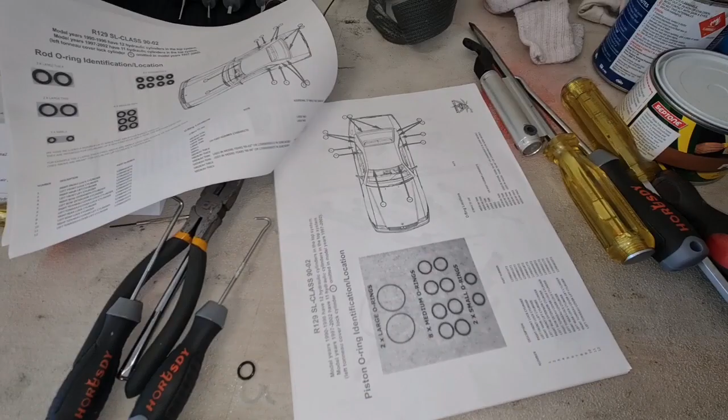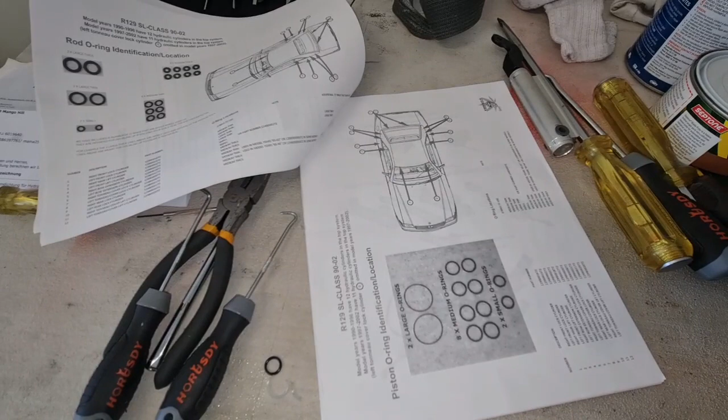Please watch this video. I have been struggling with this problem for the past 2 months and I have doubted everything. Every micro switch, every cylinder, even the pump, even I checked every single line to be in the correct port. I couldn't find this problem until today I solved this issue. Please keep watching this as there is no other video telling you about this problem.

First of all, apologize about my voice because of flu.

So after replacing all of the rear cylinder seals, including the tonneau cover, the bow cylinder and the rear locks, I had this problem that my roof operation was super slow and sometimes the lock wouldn't unlock without tapping on them. And also the process would stop with the pump stopping in the middle of lifting the bow, and the bow itself couldn't lift itself.

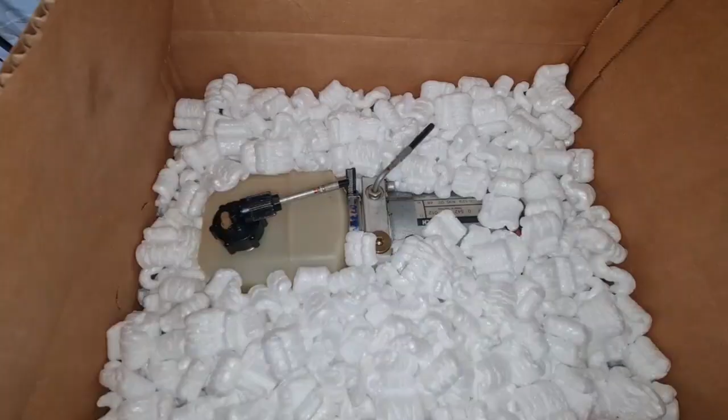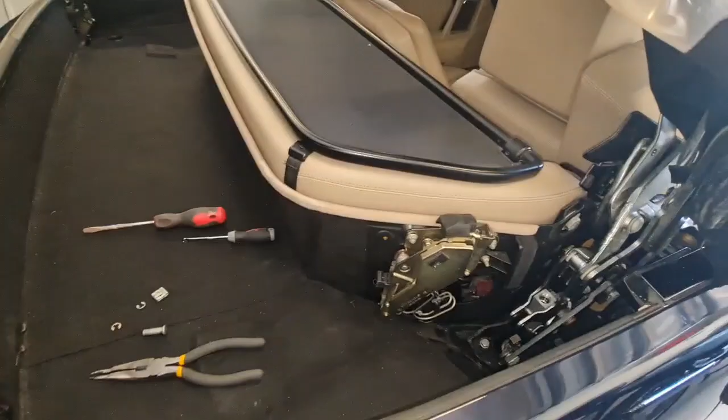So I have been thinking about all this issue the past month. I even ordered a used pump to check my pump pressure, and I tried to check everything that is wrong with my pump, and I couldn't figure it out. I replaced the pump and the pump was not faulty actually. But now I think I have found what was the problem.

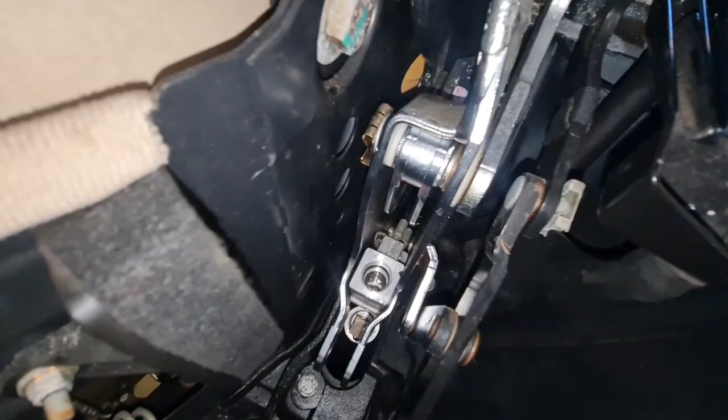So I went and looked at all of my videos and found out that I might have a problem with the bow extension because bow lift was impossible. So there was no power whatsoever to lift the bow, and this was interrupting the whole process and sequences of the top. So I came here, I took off the top pin, and as you can see, this is the bow cylinder, and using my handmade tools I pulled the top off, and here is what I have found.

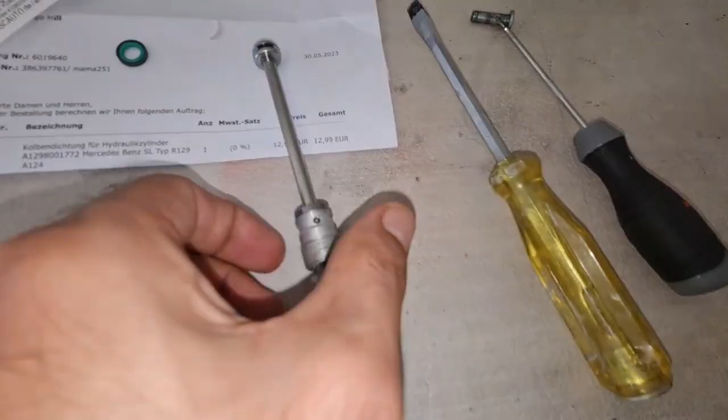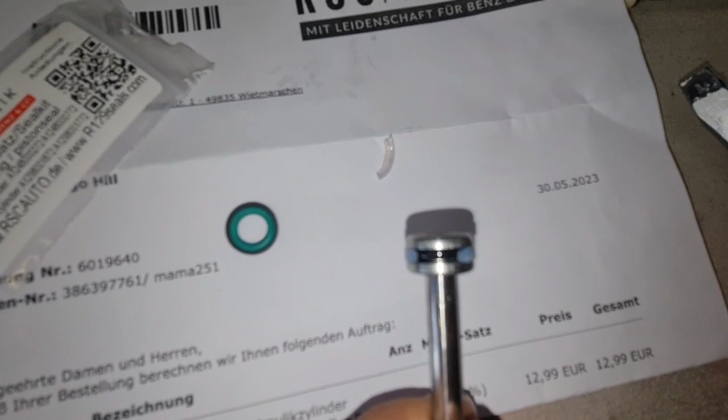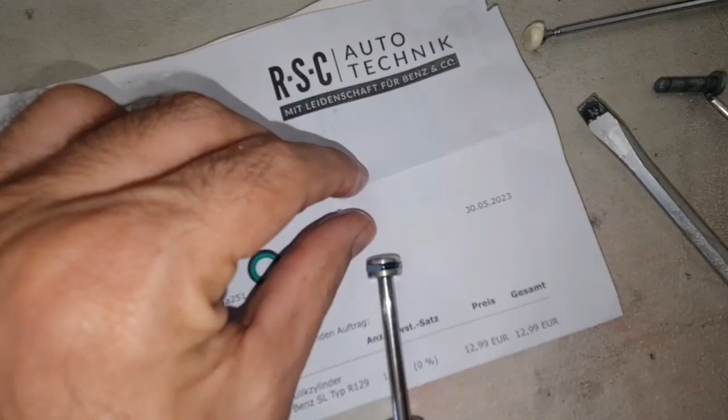So I unscrewed the top cap and I found this situation over here. The piston seal was broken and bad. And here is a piece of piston seal that I took from inside the cylinder using chewing gum.

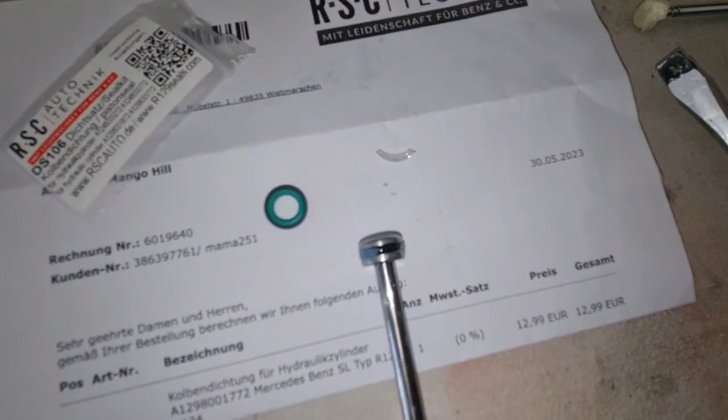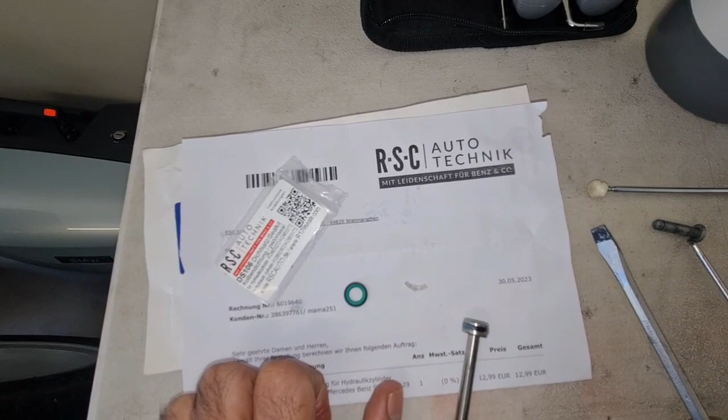So I anticipated this situation and I knew that I probably have an internal leak. So I ordered one of these piston seals from this company. This might help you. Well, I thought I'm going to get 2 of these, but unfortunately I received only 1. So I'm going to replace 1 only at this moment.

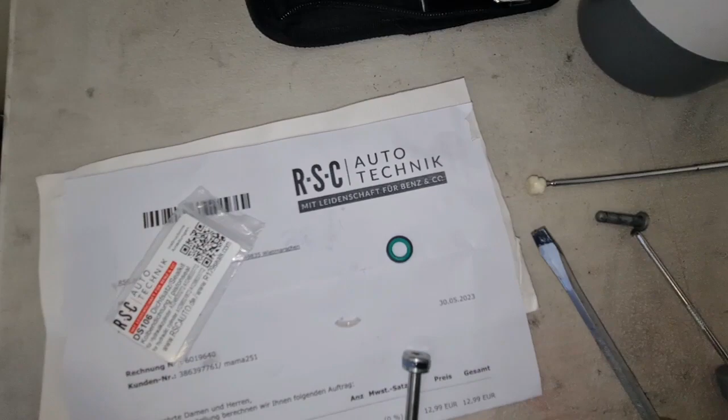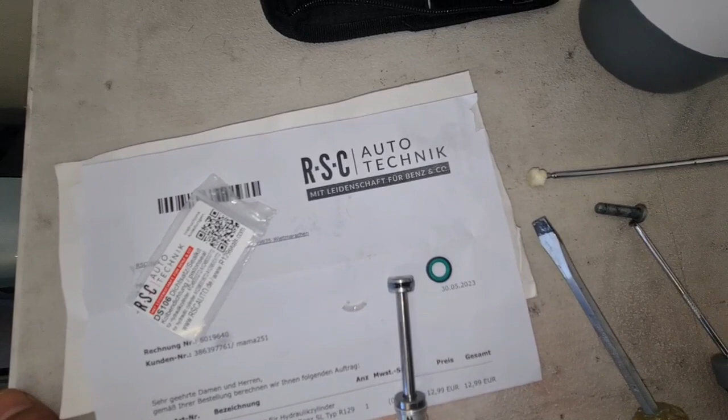I am not sponsored by these guys, but you probably will find these guys are the only people selling these piston seals. So what am I going to do? This is a very special piston seal, first of all. Second, it took me about 2 weeks to get this part, 1 seal only, and it cost me 34 Australian dollars, which is a crazy amount to pay.

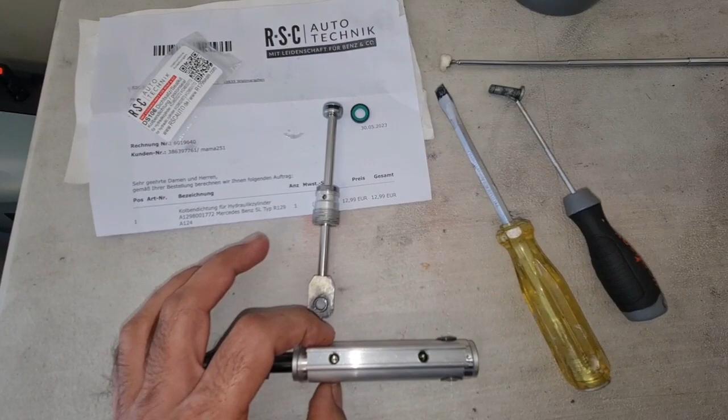So as I mentioned in my previous video, if you have such a situation, what happens is fluid comes from one port of the cylinder trying to push the piston back or forth, but because of the internal leak of the piston seal, you will get all the fluid out from the other port without being able to energize and move the piston, and the whole system will slow down because of that kind of leak, which is called internal leak or internal bypass.

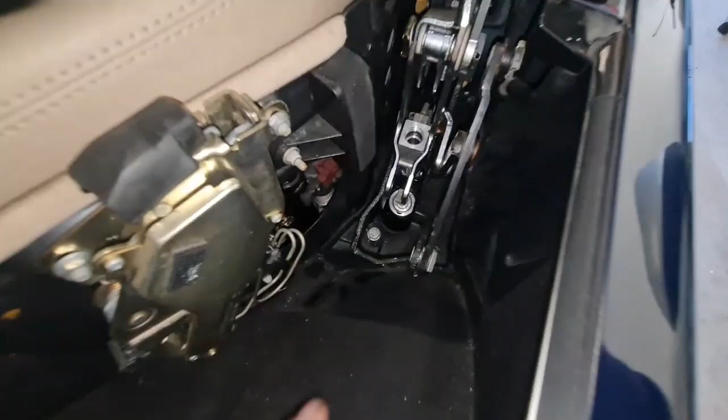So the only way to solve this problem is replacing the seals for the piston and checking that everything is good. So that's why we are going to do this today. And if you ask me how I removed everything from here without taking apart the lines and the lower pin, well, that was easy. I have a lot of access from here when the bow is up, so you can easily take off the cap using a special tool, and that's what I did.

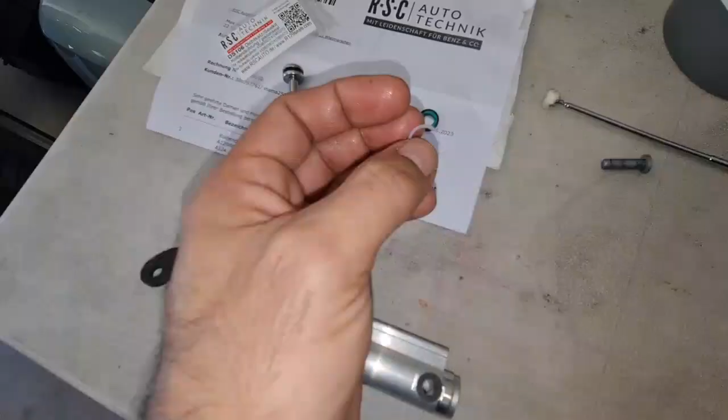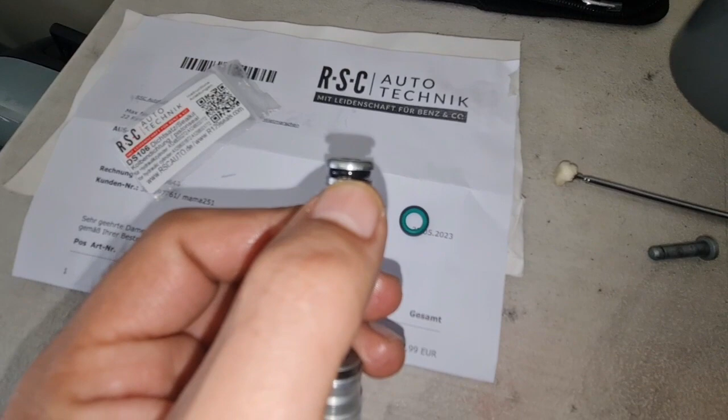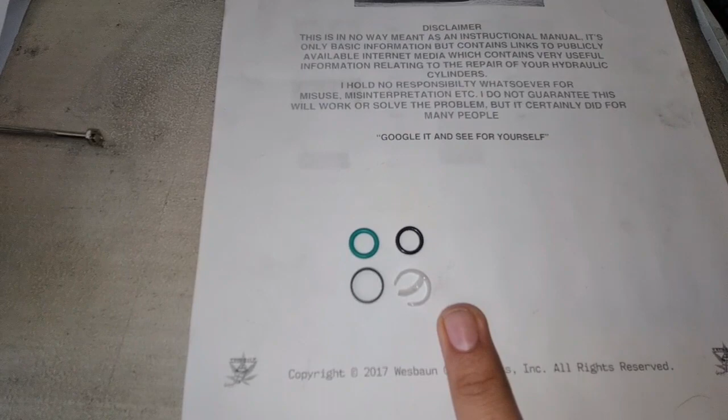So how on earth am I going to put this new seal back? Taking off this broken seal is easy. There is one internal seal in there as well that I'm going to take off. That's no problem. But how am I going to put this one back? Well, let's find out. So removing was easy because I could force these two out with no problem, and as you can see, it's out.

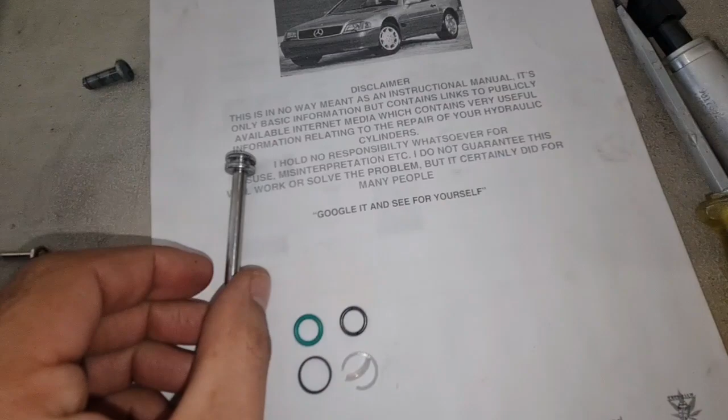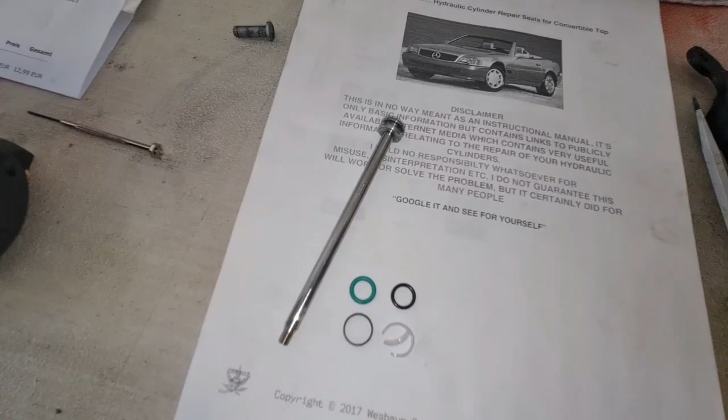So with a little experiment, I can see that my magnet does not absorb the shaft very well, but it absorbs the piston very well. So these are two different materials, and I can say this from over here.

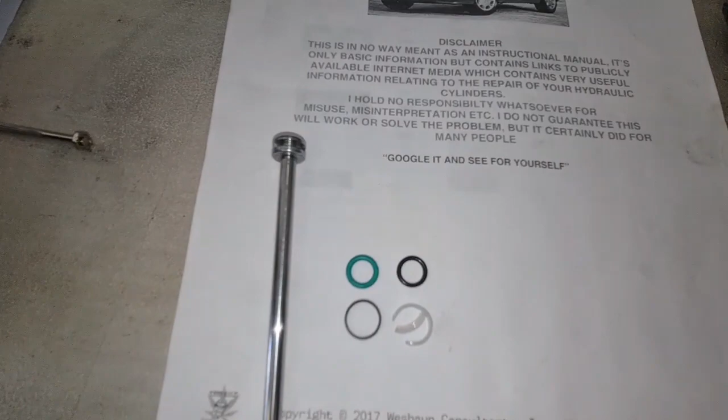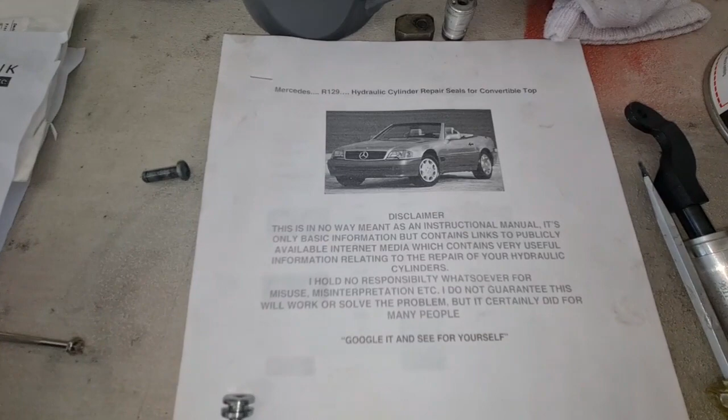So it looks like it's screwed on, but to be honest, I'm not 100% sure because there is no material at all. And even this booklet over here says that replacing the piston seals is a professional job and you need to send it to get rebuilt. So I am left with my own experiments.

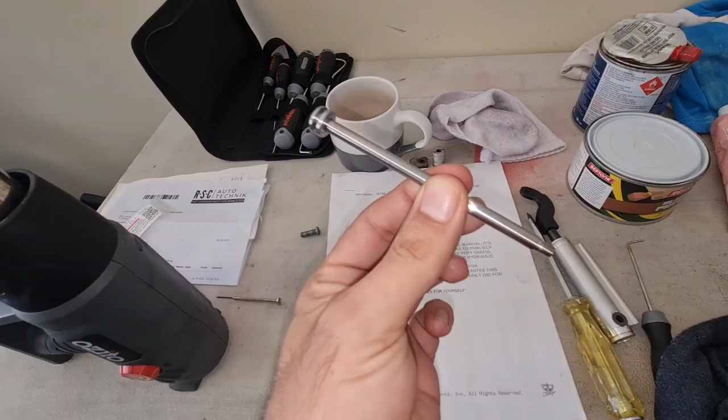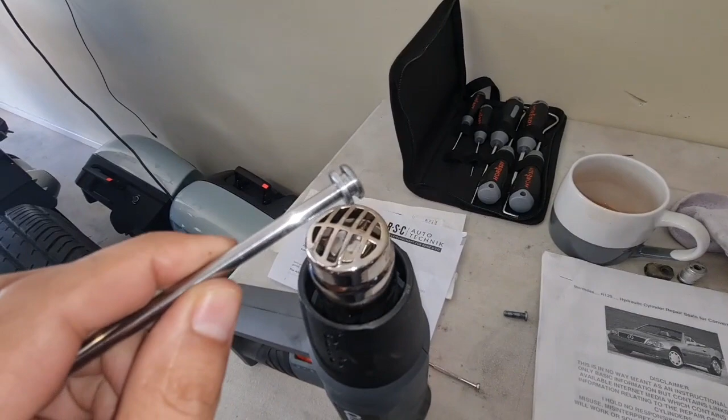What I can do, because there are no seals on here anymore, and I think there is Loctite used over here, I can heat up this shaft to see how I can remove this. So let's see. Probably I can put back the green seal, but putting back this Teflon seal is going to be problematic because it's not flexible and I cannot stretch it to go on the actual piston.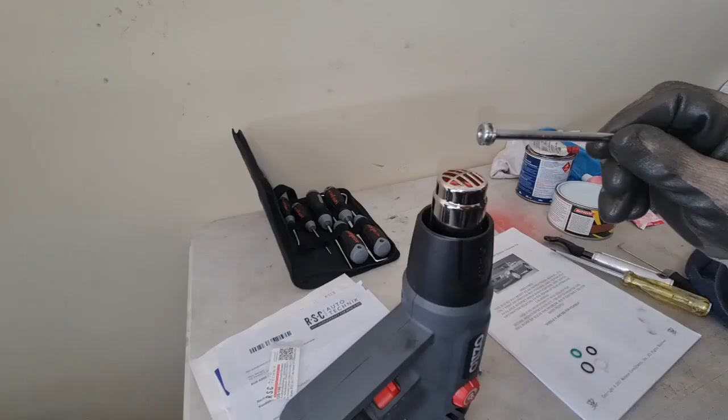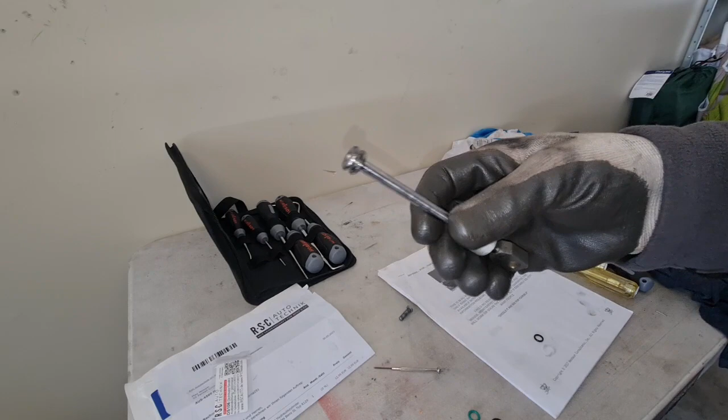So something started to smoke into the air, and that can be a good sign because the Loctite, I think, is getting burnt. So I can probably rotate this piston using some tools, being careful not to damage the piston or the rod, and then try to take it off. Okay, I tried to unscrew this piston and I failed.

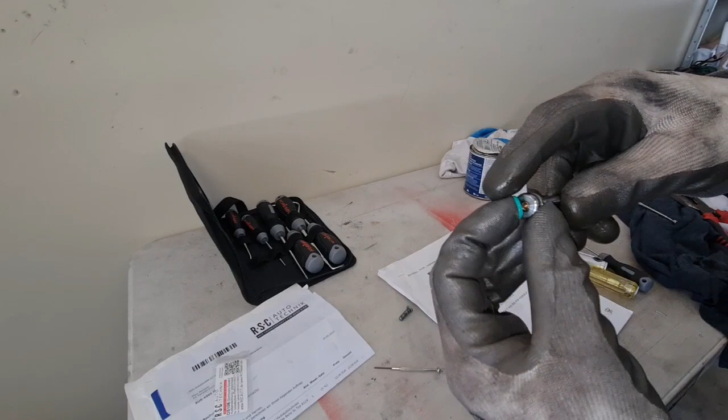So I'm going to try to put this one first. The green seal goes first. Let's see how it's possible. I have lubricated the seal, so okay, this is the first seal, it's in, and now I need to put the second seal in. And that is easily done.

So you don't have to be worried so much. Just gradually and slowly put the first seal, lubricated, in, and then go ahead with the second seal, gradually and slowly lubricate it and put it in. So there is no need to remove anything, and that's now done. So what I'm going to do is to lubricate everything again and check to see if my internal bypass or leak situation has been solved or not.

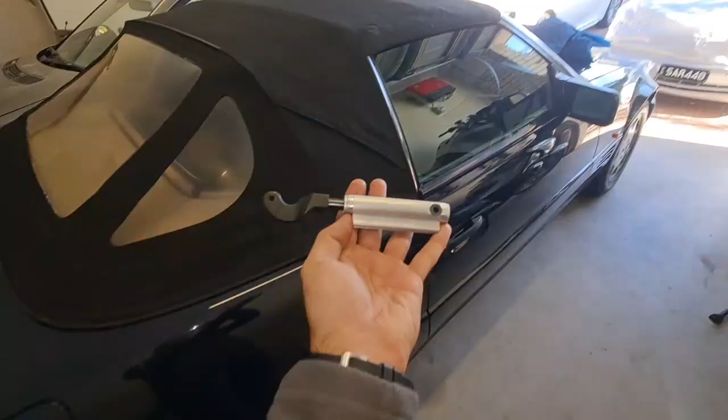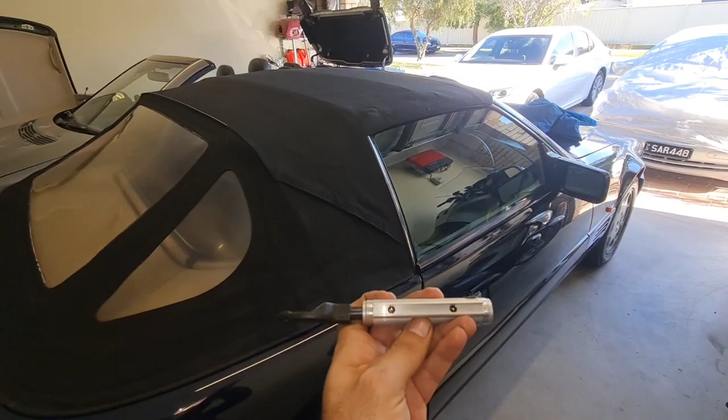So guys, there you have it. This is probably the first video about internal bypass or internal leak for the R129. Unfortunately, not many of the cylinder rebuilders want to reveal all the secrets about the issues, and sometimes odd things happen, and this is what happened to me, and it might have happened to many people as well, causing all sorts of problems and the roof of the R129 not functioning properly.

So how did I find out that my right hand side seal had this issue? First of all, when the roof wanted to lift this bow, it didn't have much energy at all. It couldn't lift itself. So I thought it could be one of the bow cylinders having this bypass situation. But I could never believe that this one cylinder could cause all sorts of trouble with the rest of the process as well. But this was actually the situation. Okay, let's operate the roof.

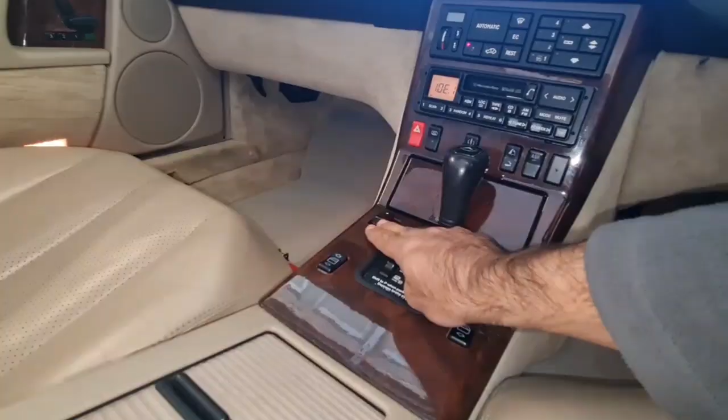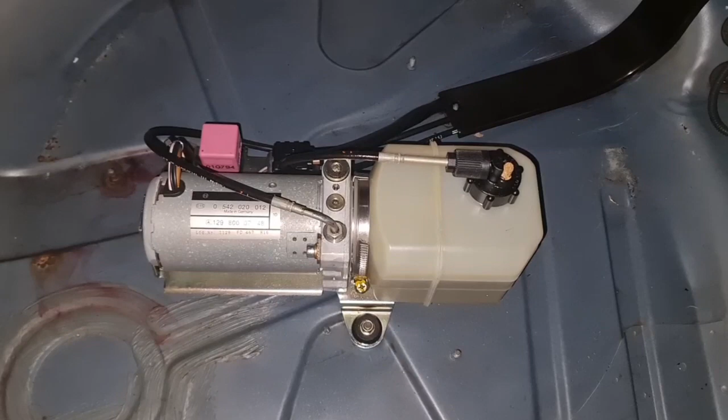So as you can see in the video, the fluid keeps coming back to the container with the roof stopping in one process. So as I mentioned, if we keep getting fluid back in the container, that means we have an internal leak or bypass in the system. And the most probable cylinder for this example is the bow cylinder. If the return of the fluid into the container stops at one point, that means the pump does not have enough pressure to lift one of the cylinders.